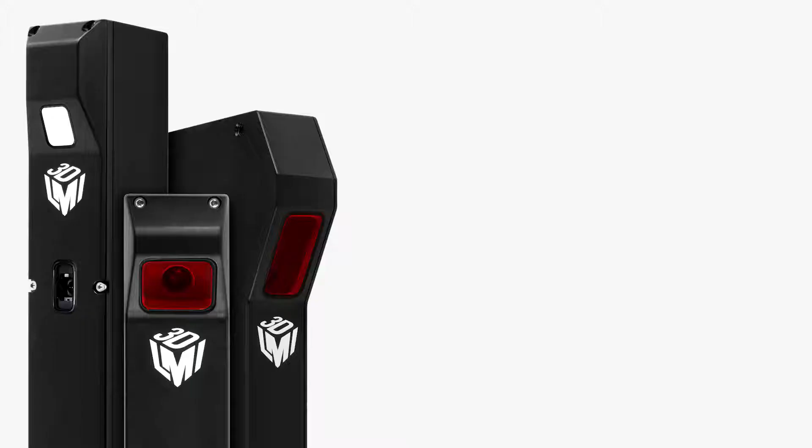Presenting Gocator from LMI Technologies. Our Gocator all-in-one 3D smart sensors are trusted worldwide for automated inline inspection and material optimization.

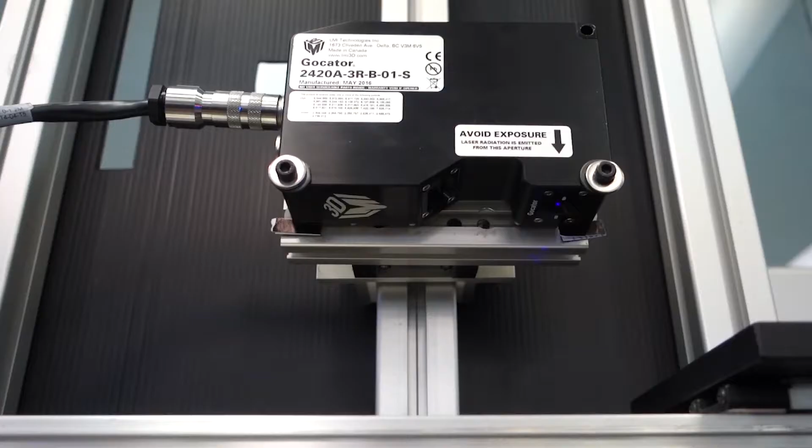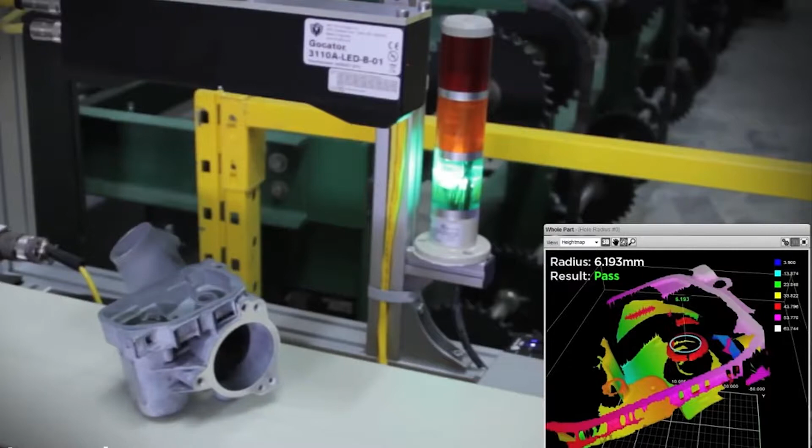As all-in-one solutions, Gocator smart sensors combine 3D scanning, measurement, and control in a single device. Advanced web technologies deliver a powerful user interface to any web browser with no external PCs or controllers required. This makes Gocator easy to integrate into existing inspection systems, minimizing system costs and maximizing product quality and throughput by automatically executing pass-fail controls.

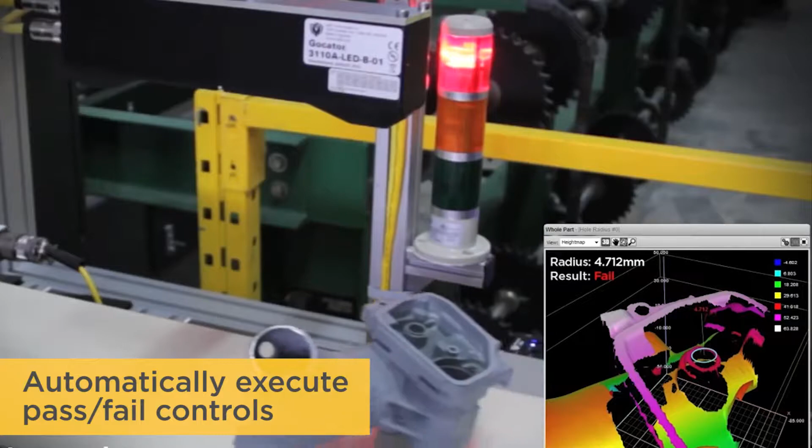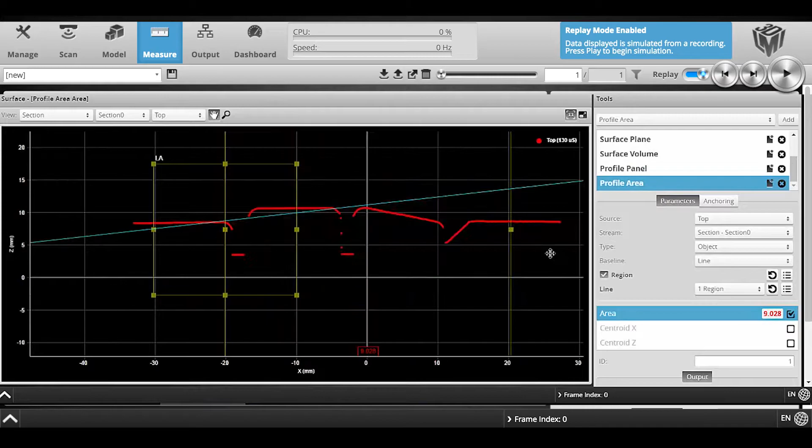All Gocators are factory pre-calibrated, so users can immediately set up the sensor out of the box and be confident that the measurements are mapped to real-world coordinates. It's simple to point it at an object and instantly, from a web browser, see a complete profile or 3D point cloud, depending on the Gocator model.

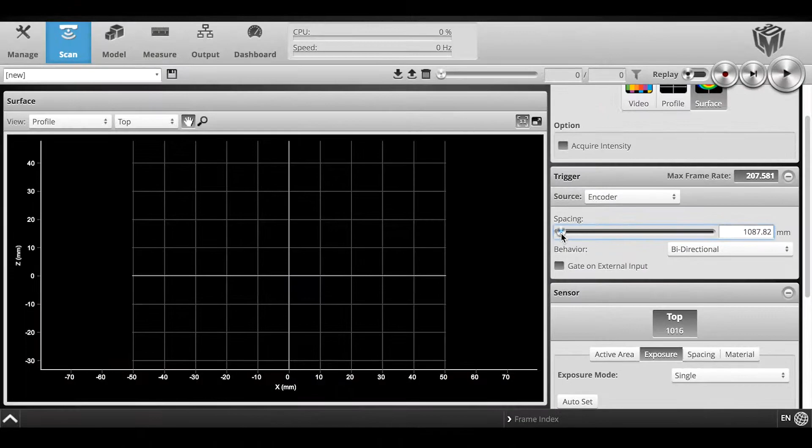You can also easily configure functions such as exposure, triggering logic, and output communication methods directly from the web interface.

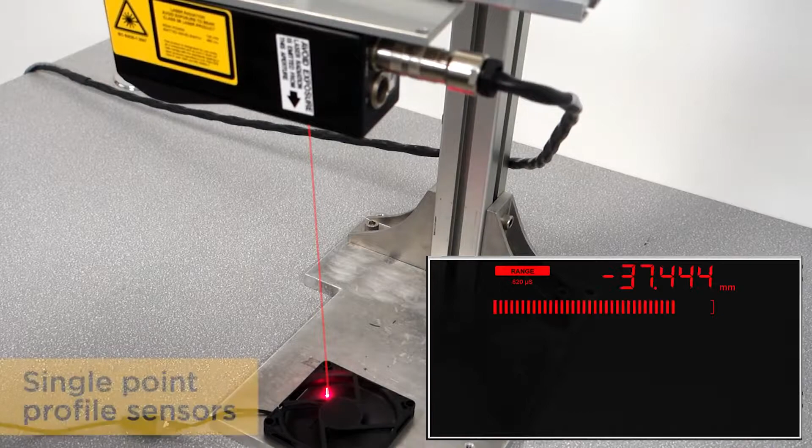There are 3 types of Gocator sensors to fit your quality control inspection needs or your specific application. First, single-point profile sensors can measure 3D thickness, height, and surface roughness by combining single points at very high speeds of up to 32,000 Hz to create a profile.

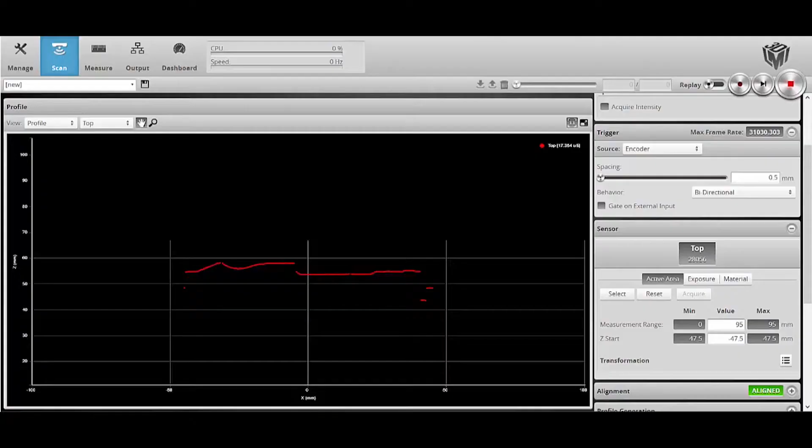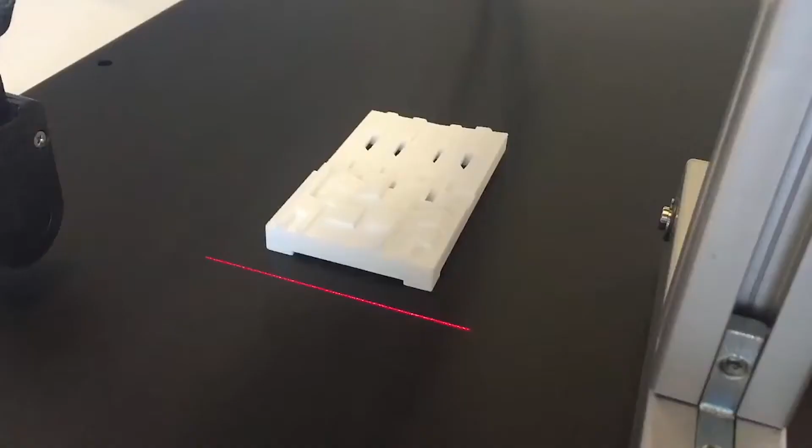Next, line profile sensors can rapidly create cross-sectional profiles for measuring features of an object's surface. By moving the object under the laser line, or through the movement of the sensor, the multiple profiles can be combined into a full 3D shape for surface or volumetric analysis.

Finally, structured light snapshot sensors generate high-density 3D data models of a stationary target using stereo cameras and fringe projection.

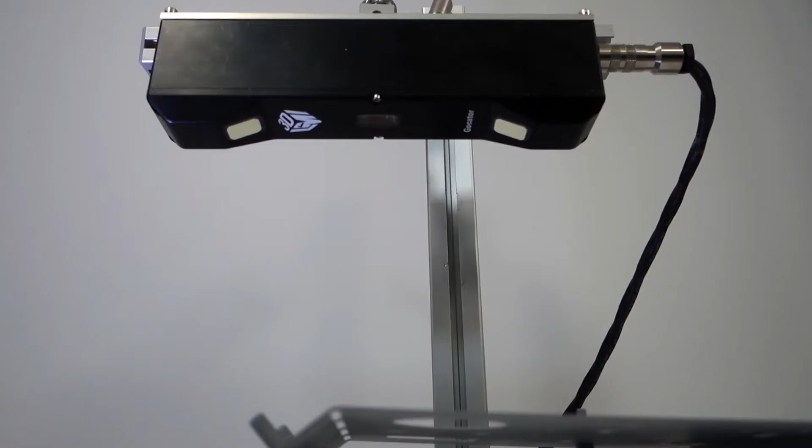Additionally, the diverse range of Gocator models within each sensor type are available to meet your desired speed, resolution, and field of view requirements. Setting up Gocator is fast and easy.

Use your favorite web browser to access and control Gocator with drag and drop functionality. The best thing is that no programming knowledge is required to get started.

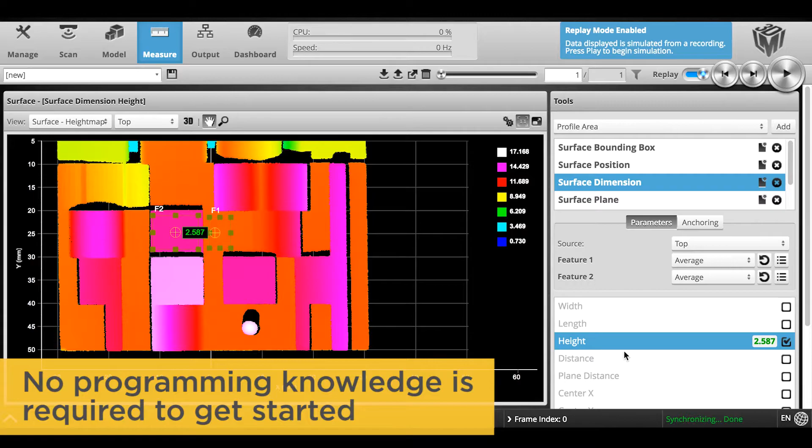Gocator's built-in tools provide a full suite of measurement capabilities to solve a wide range of inspection challenges. Calculate widths, heights, angles, radiuses, and a multitude of combinations to measure exactly what you're looking to inspect.

Gocator is more than just a sensor. There's a complete inspection ecosystem inside every Gocator.

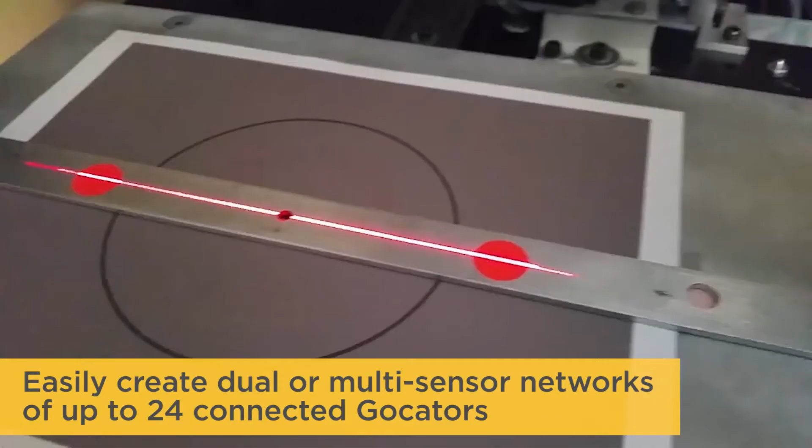Need a wider or better view? Easily create dual or multi-sensor networks of up to 24 seamlessly connected Gocators to increase the field of view and scan coverage without compromising quality. Plus, sensor synchronization is automatic and simple to manage.

Customize Gocator with LMI's Gocator Development Kit. Gain complete control to manage and customize measurement tools to meet your application needs.

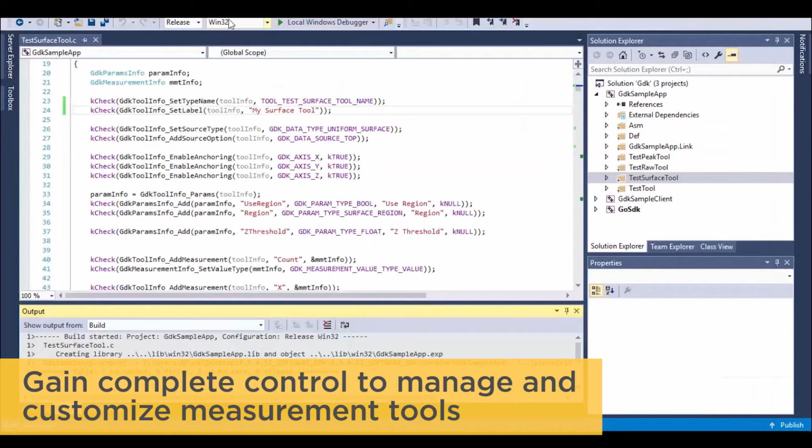Gocator makes 3D scanning and inspection easy. Start thinking of Gocator today to solve your quality control needs.